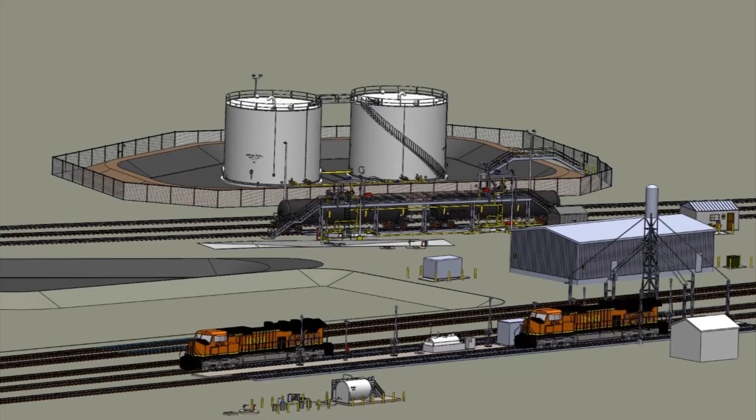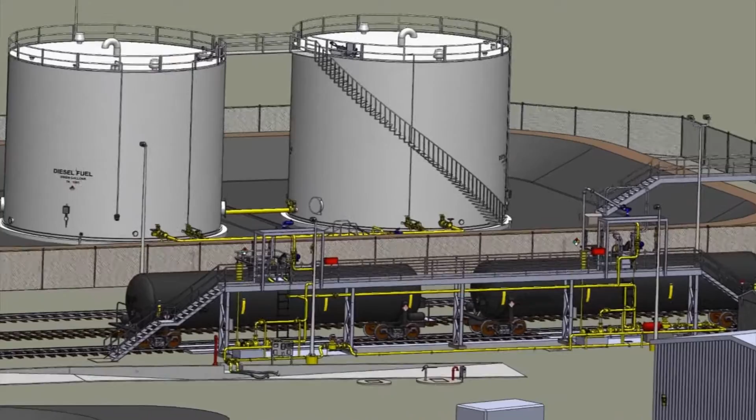The DFO tank car unload to main tank system is Product Handling System PHS 1001. This system moves diesel fuel oil, or DFO, from tank cars located at the tank car unload rack to the main tanks. Each tank car unload pump can unload DFO at approximately 200 gallons per minute at peak performance. Both pumps can be run at the same time. This equates to approximately 2.5 hours to unload two 28,000-gallon tank cars with both pumps running.

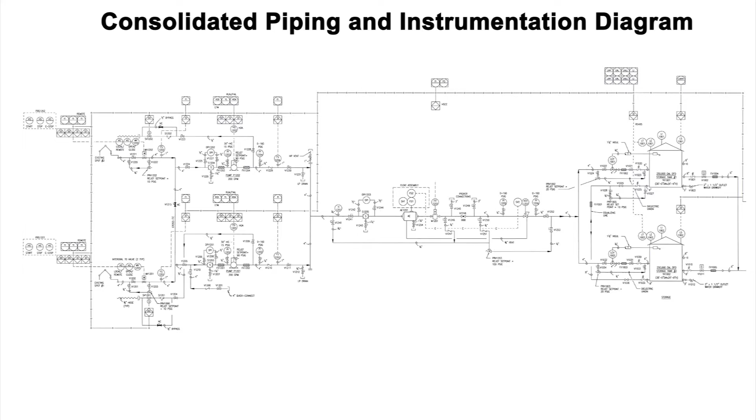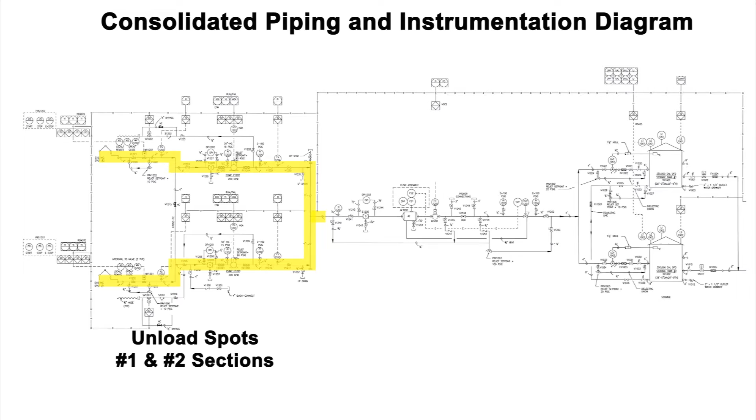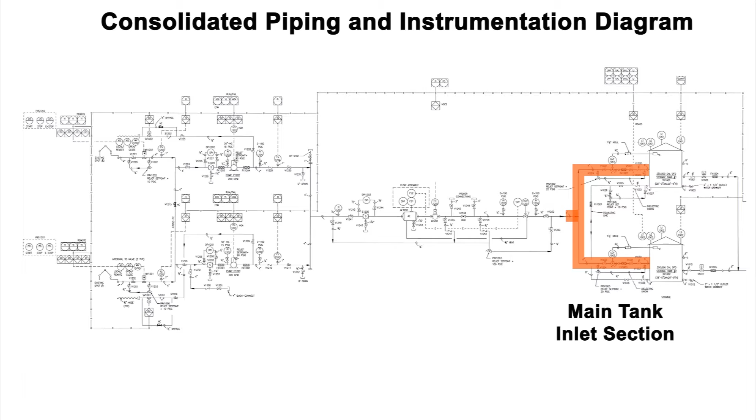The DFO tank car unload to main tank system is comprised of 5 separate sections of equipment and piping. DFO tank car spots 1 and 2 unload sections. These two sections are identical. The flow meter section. Both unload sections tee into the flow meter section. And the TK1001 and TK1002 main tank inlet sections. The flow meter section tees into these two sections.

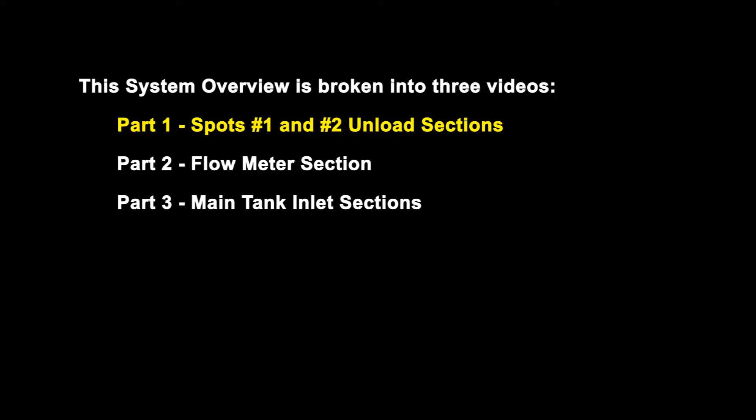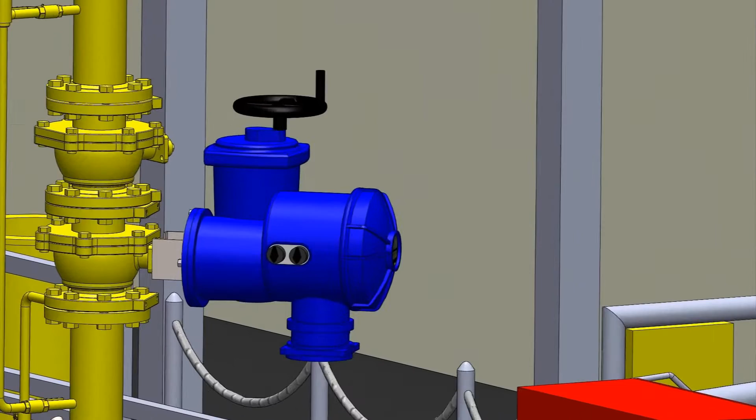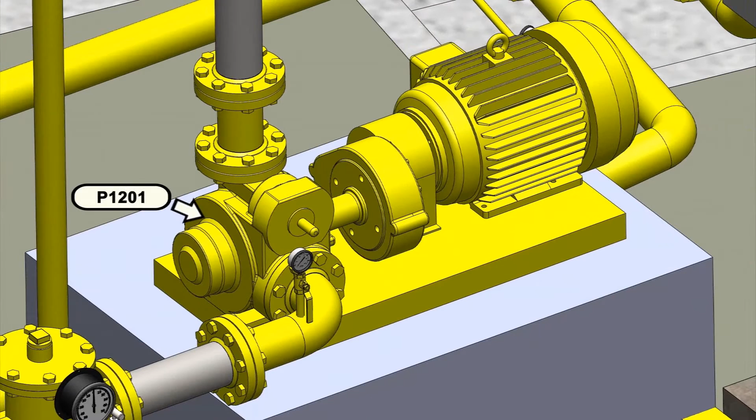Flow begins at the stinger and flows through the following equipment: motorized valve MV 1201 with pressure relief valve PRV 1201, flow switch FS 1201, basket strainer S 1201 with differential pressure indicator DPI 1201, pressure indicator PI 1201, unload pump P1201 with gearbox GB 1201 and motor MTR 1201. Unload pump P1201 is a GX4B vane type pump manufactured by Blackmer.

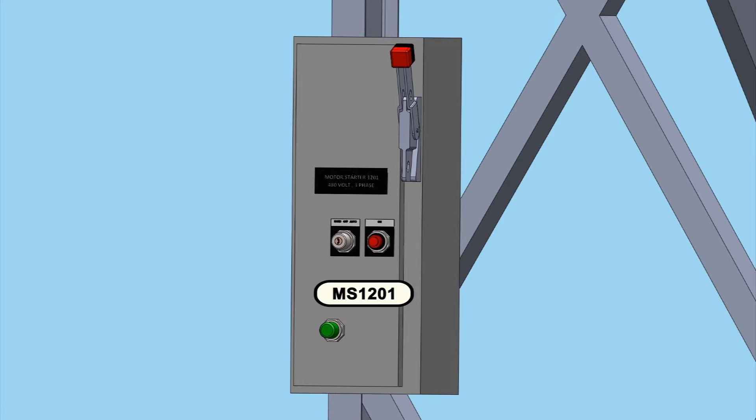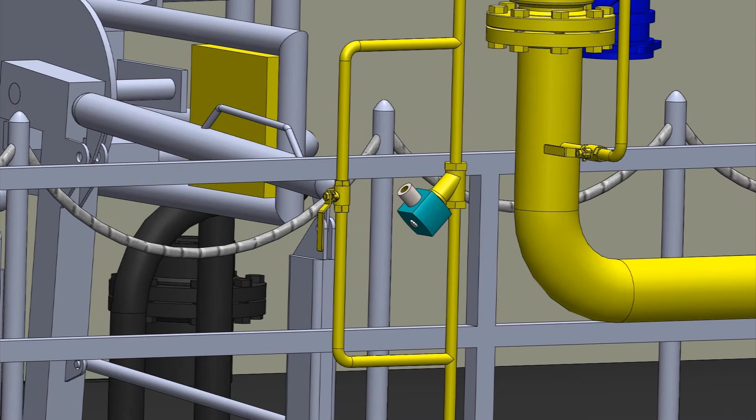Unload pump motor starter MS 1201 located below unload spot number 1. Power to MS 1201 is supplied through DP100 in the pump house. Pressure indicator PI 1202. Check valve V1210. Flow switch FS 1203. In addition, this section includes an air bleed system consisting of strainer S1201 and solenoid valve SV1201. The air bleed system vents any air in the system and primes unload pump P1201 during startup.

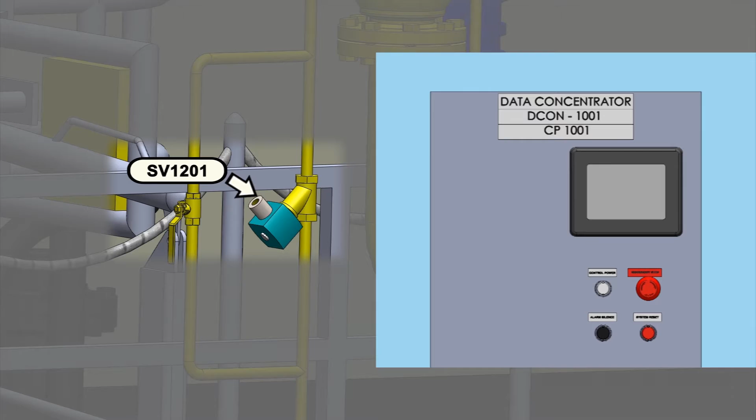The 3/8" air bleed line is placed in the tank car during setup so that the prime is released back into the tank car. The solenoid valve is controlled by the process control system and is opened for a short period during unload pump. DFO tank car spot number 2 unload section. The FMP equipment and subsystems for this section are identical to spot number 1.

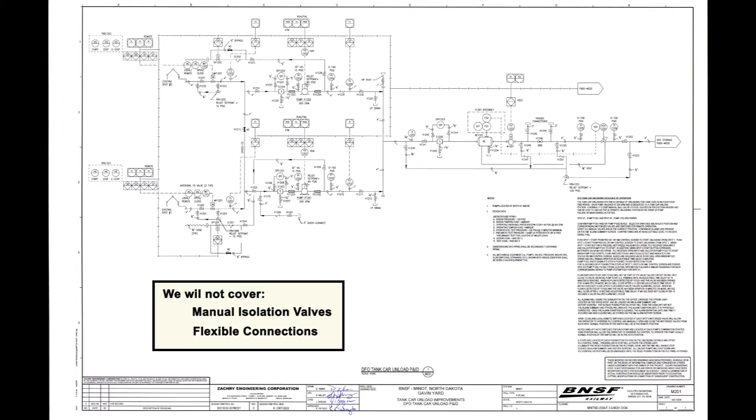This time we'll use the piping and instrumentation diagram, or P&ID, to follow the flow. To speed things along, we will not cover the manual isolation valves or flexible connections. The FMP equipment and subsystems for DFO tank car unload spot number 2 include unload pump push button station PBS 1202, motor valve MV 1202 with spring check relief valve PRV 1202, flow switch FS 1202,

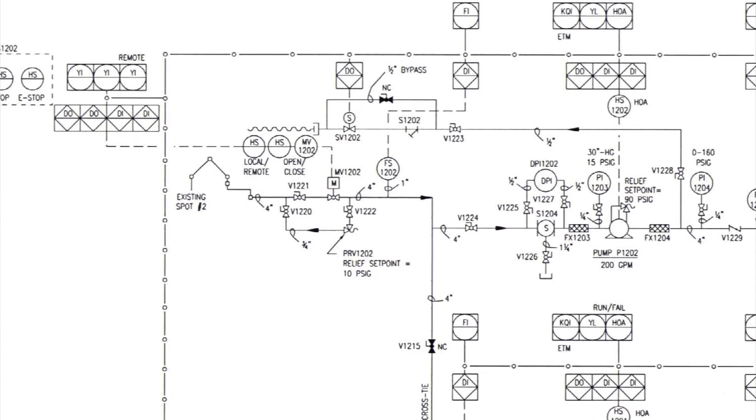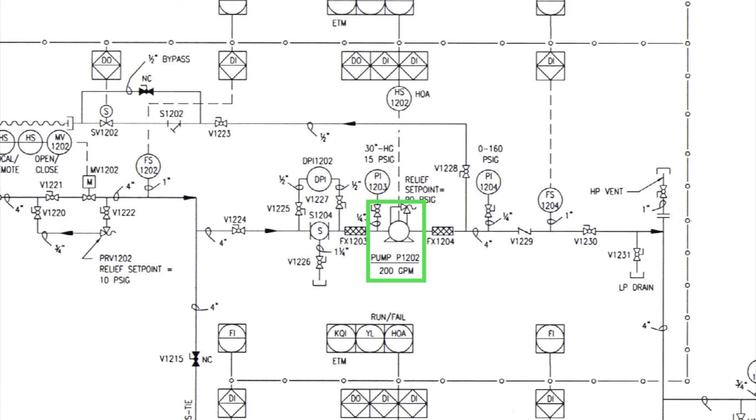pipeline to unload spot number 1 with normally closed ball valve V1215, basket strainer S1204 with differential pressure indicator DPI 1202, pressure indicator PI 1203, unload pump P1202 with gearbox GB 1202 and motor MTR 1202, unload pump motor starter MS 1202 located below unload spot number 2, pressure indicator PI 1204, check valve V1229, flow switch FS 1204, and drain valve V1231.

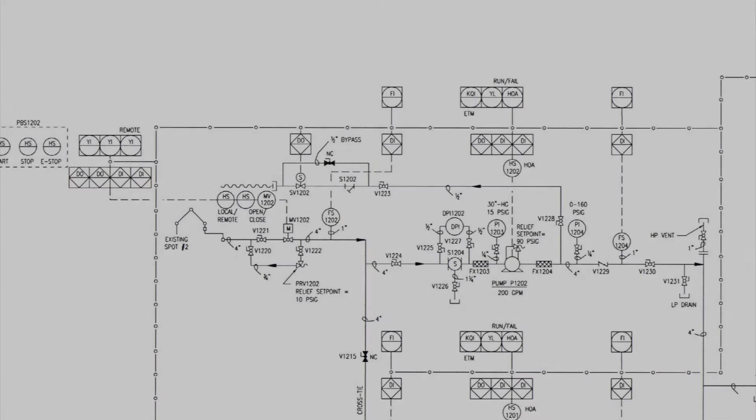In addition, this section includes an air bleed system consisting of strainer S1202 and solenoid valve SV1202. That concludes System Overview Part 1 of 3. Part 2 of 3 covers the flow meter section.